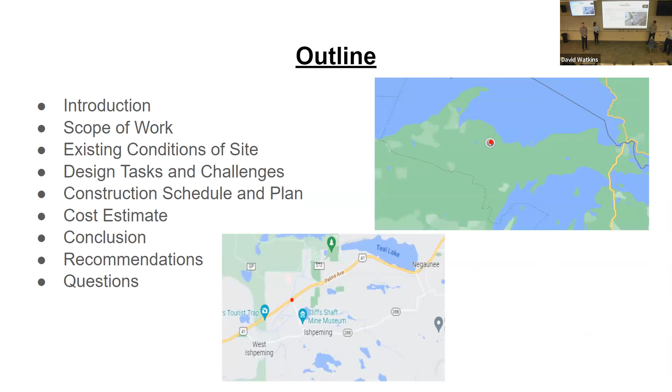The scope of our project is redesigning the culvert running under North Lakeshore Drive in Michigan. MDOT is installing a new roundabout at this intersection, and it's going to alter the route of US 41 and change the culverts that direct Carp Creek. Our design will include a hydrologic analysis, hydraulic design, soil erosion and sedimentation control, construction estimating and scheduling, and the maintenance of traffic plan.

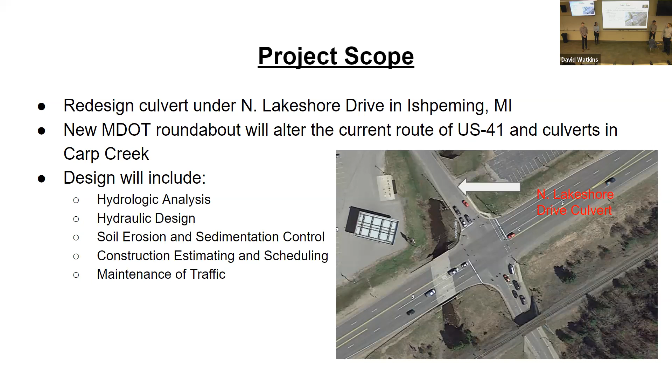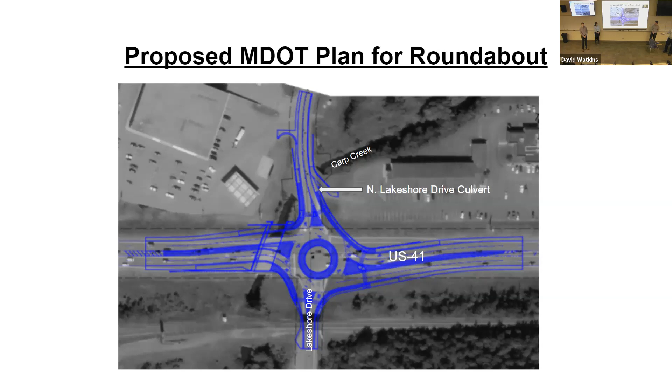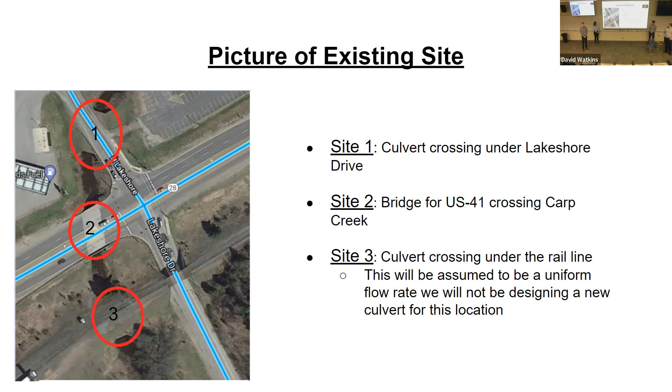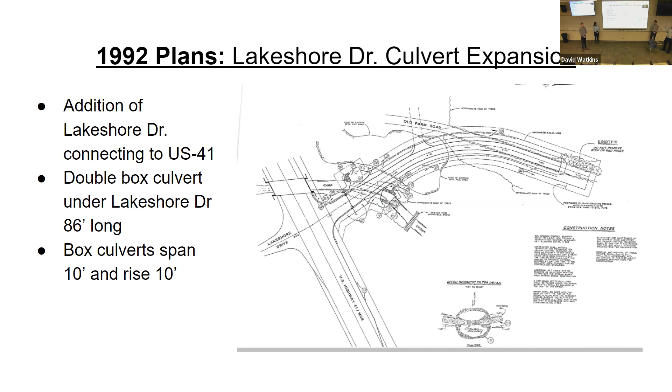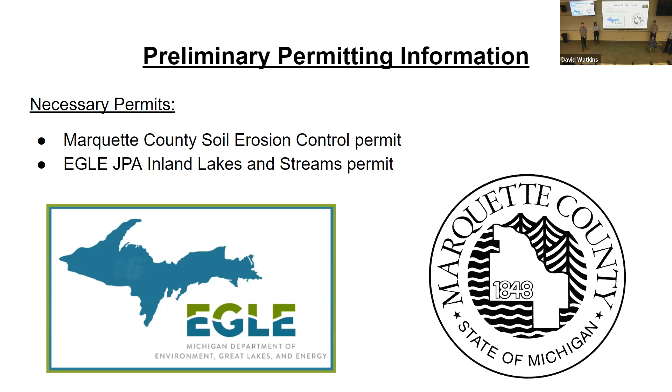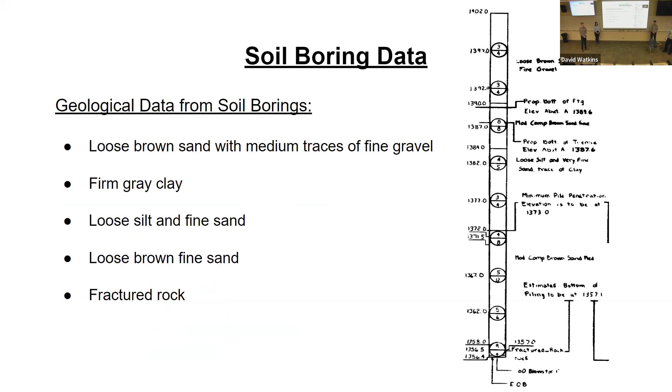In order to design our new culvert, we were given discharge rates from EGLE. At the railroad that Jacob was talking about, for the 100 flood event, the annual discharge was 550 cubic feet per second. Under US 41 it was 600 cubic feet per second. And at Lakeshore Drive, which we were designing for, it was 720 cubic feet per second.

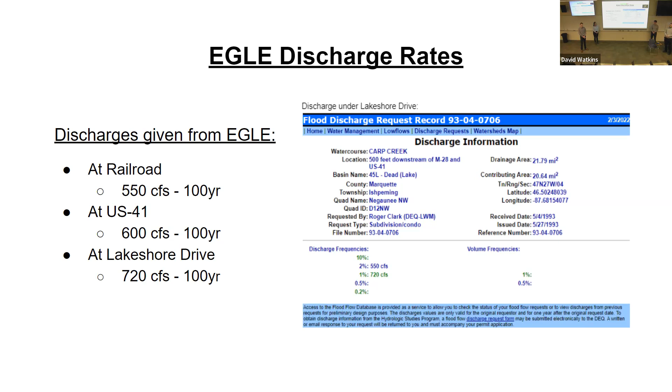The reason these increase from the railroad, which is upstream, to Lakeshore Drive, which is the furthest downstream, is that there are catch basins on US 41, and drainage from the parking lot that flows into Carp Creek. There's also, at the existing site at the culvert we're redesigning, a drain that goes through the upstream wing wall that actually flows into Carp Creek.

To double check and make sure we had the same data as EGLE, we used their discharge spreadsheet and found that we had a composite curve number of about 68, which was moderate runoff and infiltration. The curve number is just a measure of rainfall runoff and how much of that rainfall infiltrates the ground. The time of concentration we found was about 14 hours, based on the topography and geography of the land as well as land use.

The time of concentration is basically how long it takes for water to get from the furthest part of a watershed, in our case the Dead River watershed, to the water body, which in our case is Carp Creek.

The 1% frequency is equivalent to the 100-year annual flood event. We came up with about 667 cubic feet per second, which was similar to the 720 cubic feet per second that EGLE came up with.

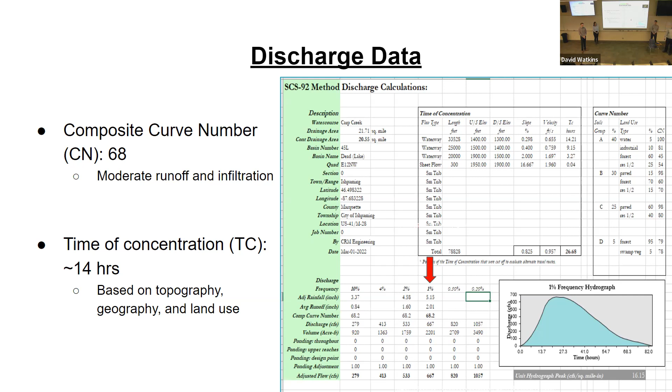So a little bit on our actual culvert design. We used HY8 to design it. The existing culvert is a double barrel with a 10-foot rise and 10-foot span. We're increasing this to a 10-foot rise by 12-foot span while maintaining the 2-barrel culvert. We did this in order to decrease our outlet velocities and extend the lifespan of the culvert, since lower velocities won't have as much of an effect on it.

As you can see in this table on the right, the outlet velocity for the 100-year annual flood event was right around 10 feet per second. MDOT calls for an outlet velocity less than 6 feet per second, so that it doesn't wash out downstream. Anything greater than 6 feet per second, like we have here, requires special treatment.

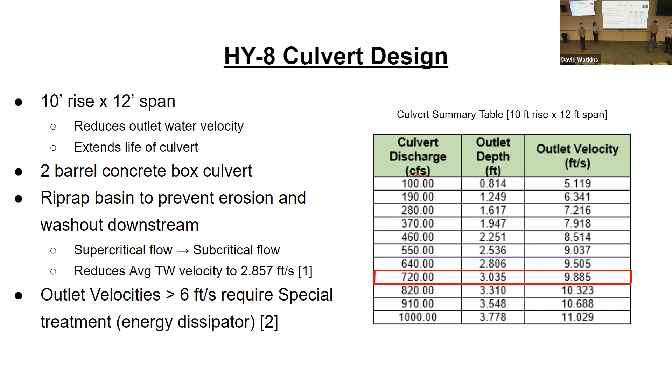So we are implementing a riprap basin. This will basically transfer the flow from supercritical, which is your whitewater flow, to subcritical. We were able to effectively reduce the average tailwater velocity to 2.8 feet per second. We'll talk a little more on the next slide.

Because we weren't able to actually get to the site and see if there was a scour hole right after the culvert, we decided to plan that there was a scour hole and implement a riprap basin.

Based on HY8's calculations, the riprap basin is going to be 96 feet long downstream, 50 feet wide, and 2¼ feet thick. It's going to consist of class 1 riprap, which you can see on the right. This is an estimated 600 tons of class 1 riprap.

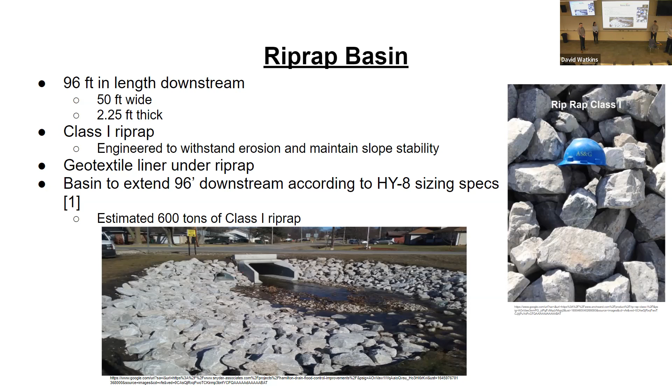On the next slide, as a contingency, we're not exactly sure if there is a scour hole, because 96 feet downstream is very excessive for riprap. It's a lot, and it doesn't necessarily need that. But that's just what HY8 came up with.

If there isn't a scour hole, as you can see here, this is taken directly from the HY8 manual - this is the scour hole, the initial dissipator pool. If that isn't there, this whole dissipator pool section will essentially be taken out, and the riprap apron will be shifted up. This apron would only be 24 feet downstream, but still remain 50 feet wide and 2¼ feet thick, and would only require 150 tons of class 1 riprap versus the 600 tons with the basin. This would save an estimated $8,800 in material.

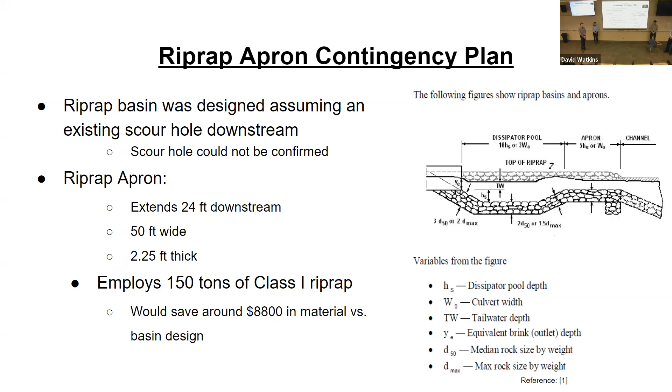Along with HY8, we also used HEC-RAS and modeled the existing and new design. For the existing culvert, there's a hydraulic jump at around the 1% storm event at 720 CFS, about 2 feet per second. The exit velocity averages 8 feet per second, above the 6 feet per second standard set by MDOT. For the new culvert design, all exit velocities are lower than 6 feet per second, around 3 feet per second at the end. There's also no overtopping for any event up to 0.2%.

We did attempt to do the riprap design within HEC-RAS, but the software is in beta and only represents 1 dimension, so we ended up not using that and just sticking with the HY8 design.

Along with the HY8, we did a traffic management plan. The current plan is to take all the traffic going to the intersection at Lakeshore Drive and push it up to Country Lane and across River Parkway. The Jubilee Foods will still have access to North Lakeshore Drive, but this will be closed to through traffic as the construction site is closed off.

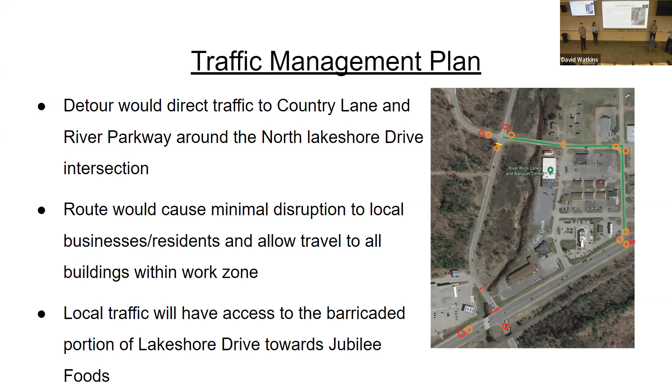For the remediation plan, we estimate we'll need approximately 70 feet of silt fence, placed at the north end of the culvert as well as near the front of the temporary culvert, to reduce pollutants caused by construction. We're also using a filter bag and pump to reduce pollutants leaking into the stream and reduce water leaving without being processed to remove contaminants.

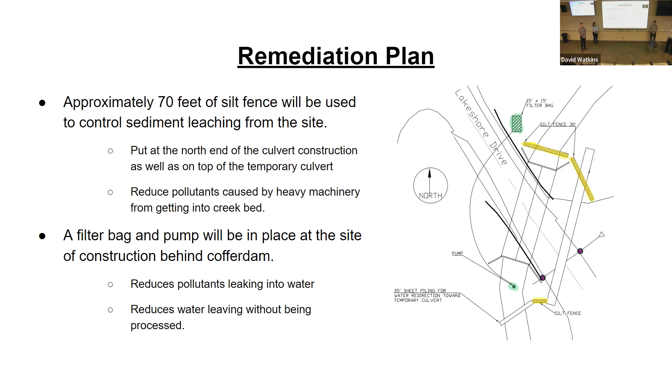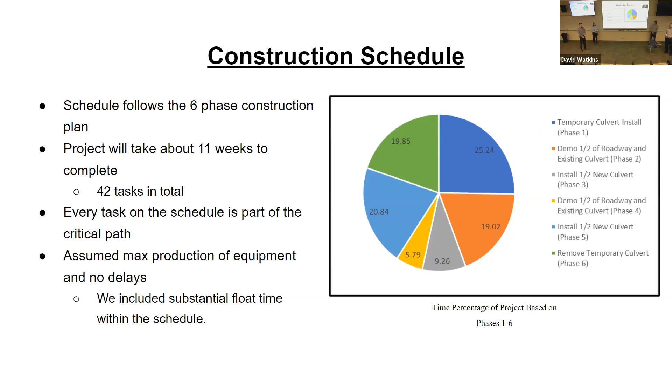Our 6-phase construction plan: phase 1 will be temporary culvert and sheet pile install. Phase 2 and 4 are exactly the same, demoing half of the roadway and existing culvert. Phase 3 and 5 are also the same, installing half of the new culvert in the demolished area. Phase 6 will be removal of the temporary culvert.

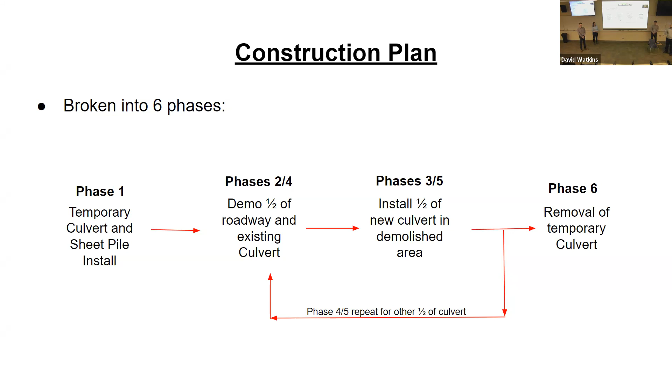Phase 1 is the temporary culvert install. South of the culvert, we're going to take out about 140 feet of area and put in 140 feet of 96-inch CMP, then use sheet pile to cut off the canal so we can direct the water into the temporary culvert.

Phase 6, after the other phases are done, is ripping out the temporary culvert and then backfilling. For phases 2 and 4, we start with the southbound lane, removing all the pavement and subgrade, then removing all the culvert sections underneath, putting down our base, installing the culvert sections, then burying it. Then we move to the northbound lane, take everything out, put everything back, and pave over it, so there's still access to both sides during construction.

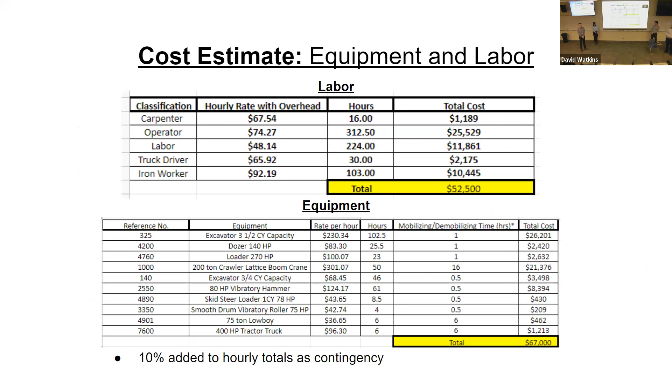So our total cost estimate comes out to about $1,455,000. This is just for the culvert reconstruction, not the roundabout design itself. In here we have the labor costs, material costs, equipment costs, and then subcontractor costs, which is basically every aspect of the project that we're subcontracting out.

The signage costs, that's just one lump sum that we calculated. Guardrail removal, installation, and then road resurfacing. And this accounts for 15% overhead.

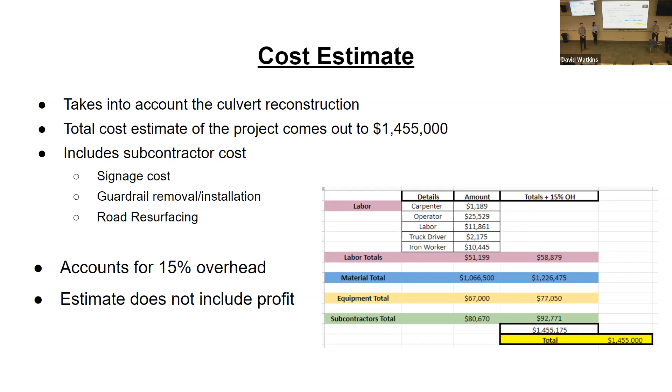So just to wrap this up, the main points are: we're increasing the size of the culvert from a 10-foot span, 10-foot rise, to a 10-foot rise, 12-foot span, to decrease outlet water velocity. We're adding a Riprap Basin to prevent erosion and serve as an energy dissipator. A detour will be implemented to still provide traffic to all the businesses and access to private properties.

And then construction's broken down into 6 phases. It'll take around 11 weeks to complete. And the cost of the project, as I just stated, is about $1,445,000.

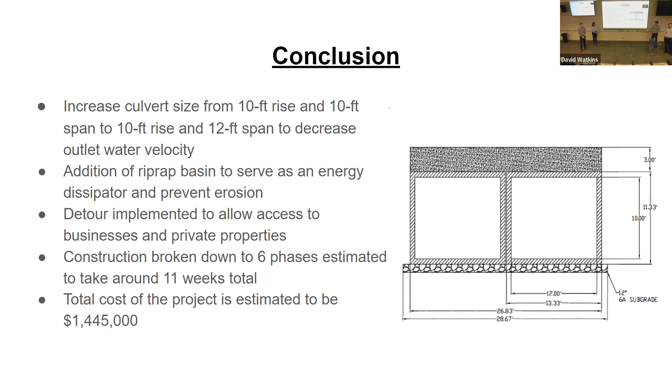So CRM Engineering recommends that the culvert under North Lakeshore Drive not be built, for 2 reasons. The current culvert is only 30 years old, and MDOT standards specify that culverts are designed for a 50-year lifespan, so it's only 5 years over its half design lifespan. It seems like it's in good condition. This was the only picture you'll be able to get with winter and the snow.

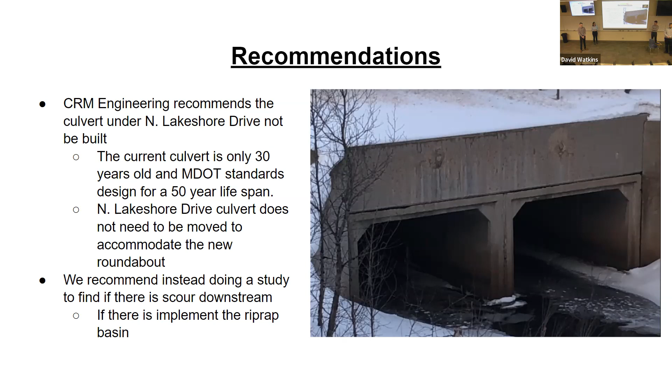And North Lakeshore Drive culvert does not need to be moved to accommodate the MDOT roundabout. They stated in their proposal plans that it will not be altering the route at that culvert. We recommend instead doing a study, as we were mentioning earlier, to see if there's a scour hole, and if that scour hole does exist, implementing either the Riprap Basin or apron, depending on the problem itself.

Any questions? Yes, I have a question. Yes.

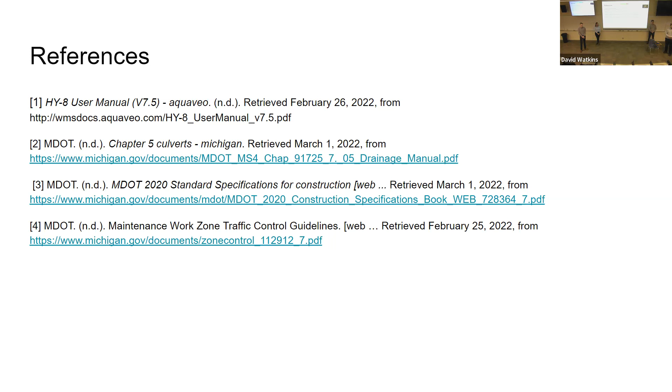So can you explain to me what a hydraulic jump is, and two, why it's important to identify the location of the hydraulic jump? Okay, a hydraulic jump is when it goes over a velocity difference, so it changes as you go through, like going into it, and it can cause higher velocities at the end and can cause more scour.

How did you identify that's what it was? Where it was? Well, actually, I had Dr. Watkins help me with it, because we were looking at this together, and he saw the jump and told me about it. I'm still understanding what exactly it is, but he's definitely the one that helped me with it.

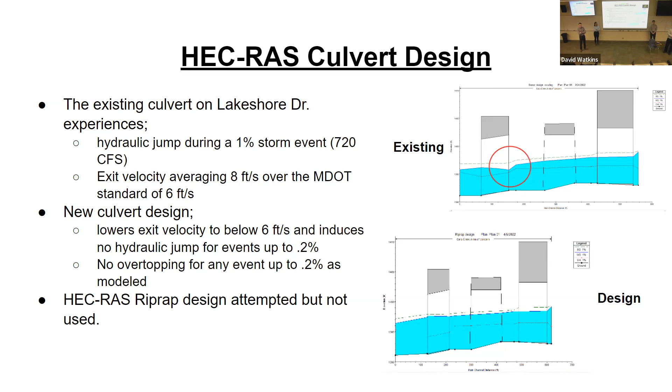Got it. Okay, I have one more question. You had a slide later on with the construction of the culvert, precast box components. I'm not familiar with this type of segmental construction.

So culvert, right, water, large volumes of water going through. Yes. So is there any special joints that you have to have between the individual segments? Is there like a gasket or something, for the segments, like horizontally, or the barrels?

They have individual segments, right? They get sealed together. Oh, they get sealed together. So how does—I'm just curious. Usually it's like a plastic or like a caulk that they pump in, they pressure them together, and they stay together. It's the same thing they do in between both sides of the culvert, both box culverts.

So you're basically, in layman's terms, putting caulking in there. Yeah, they basically glue it together. Then after they're stuck together, they'll go inside and take grout and fill in any cracks so water can't force its way in.

So they seal up the cracks, you said? Yeah, they inject them.

Okay, cool, because I was just going to ask you—do they put a liner inside, because concrete shrinks and cracks? They put a liner inside? No, they just seal the cracks with grout. And I think they might treat it with something, but I have no idea what they're going to do with that culvert. I haven't seen them put linings on any box culverts.

I think some precast companies will actually treat the precast before they send it out into the field, but in this case we weren't told that it was treated. But I know that some companies do that. Yeah, I was just curious. There's that flex seal spray stuff.